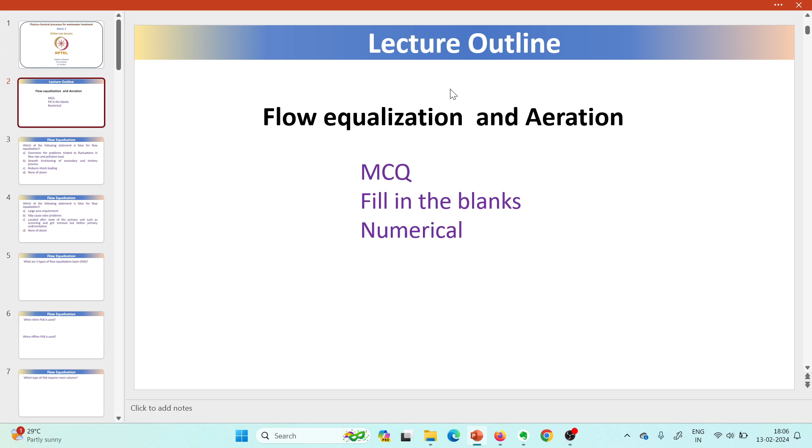So let's start now. This is week 3, and this is the lecture outline for week 3. We will study about flow equalization and aeration. Some part of aeration we will study in week 4 also, and some part we will study today.

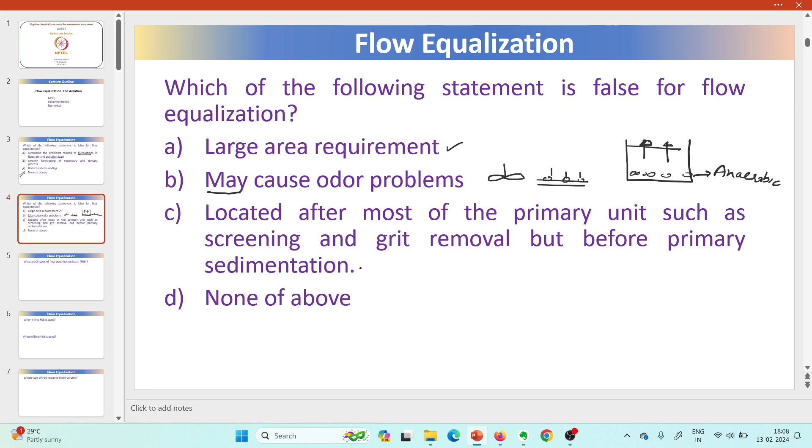Which of the following statement is false for flow equalization? It requires large area requirement - yes, it requires area. May cause odor problem - yes, it is said 'may cause' because sometimes when we don't do mixing or aeration, the suspended solids will settle and anaerobic condition will prevail. So gases will evolve and it will cause odor problem. It is located after most of the primary units such as screening and grit removal, but before primary sedimentation - yes, this is also correct. So the answer is none of these.

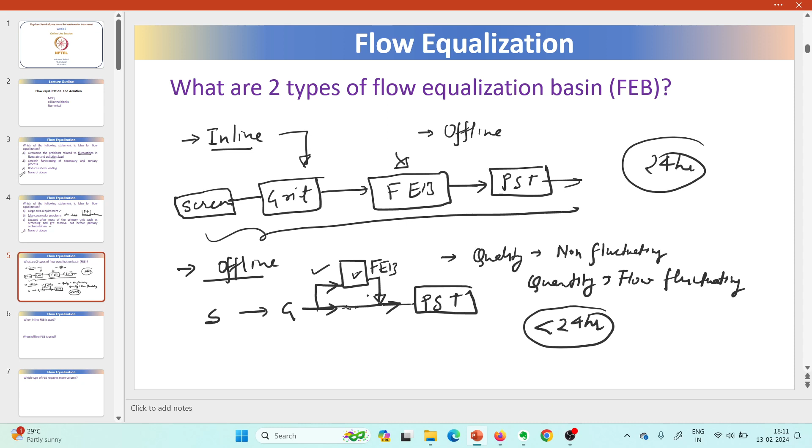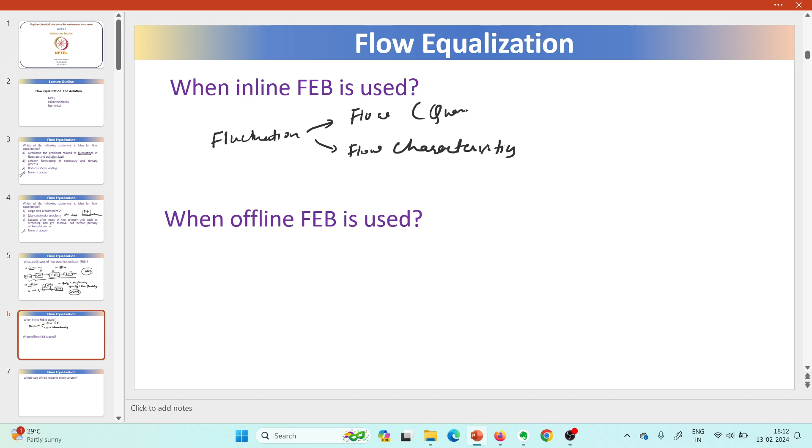So these are the two types of flow equalization basin - they are used to reduce the fluctuations of flow and flow characteristics. Inline flow equalization basin is used when there is fluctuation in flow and flow characteristics, or we can say quantity and quality. Offline flow equalization basin is used when there is fluctuation in flow only - that we discussed earlier also - fluctuation in only flow, or discharge, or quantity of water or wastewater.

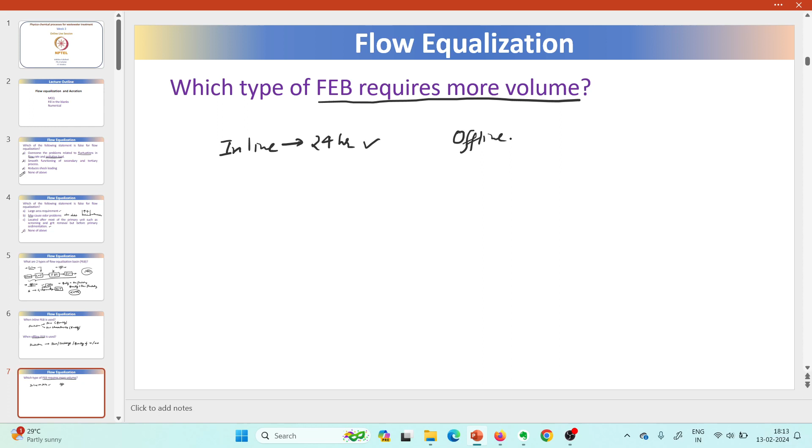Which type of flow equalization basin requires more volume? So we studied the inline will be used 24 hours - let's take an example in a day, because for 24 hours the water will enter into the wastewater treatment plant - while offline it will be used for less than 24 hours, so this will require less volume.

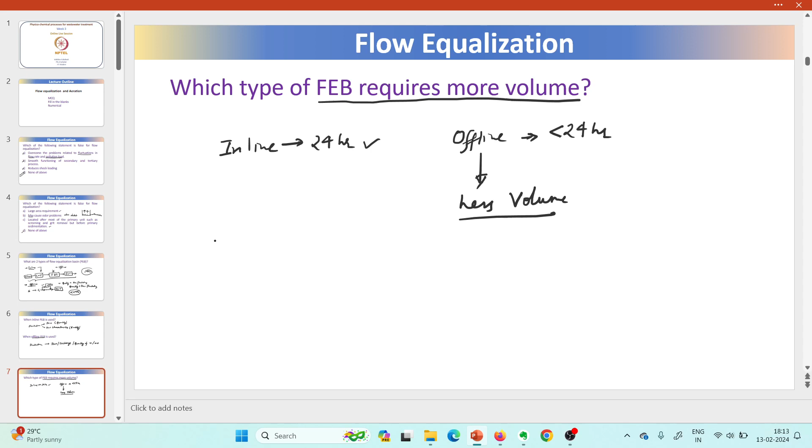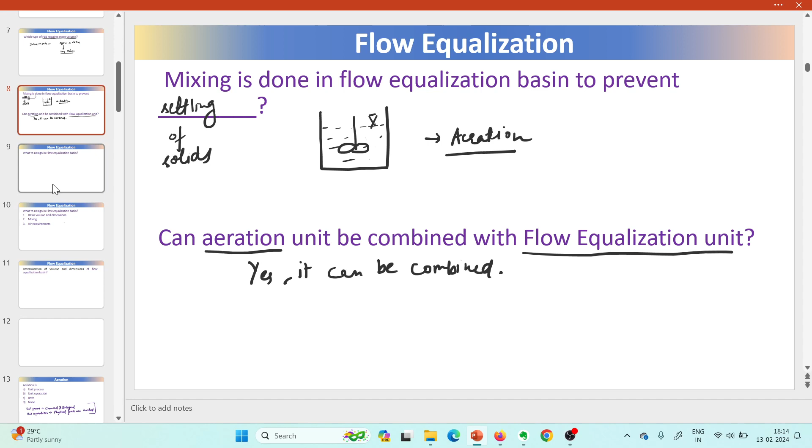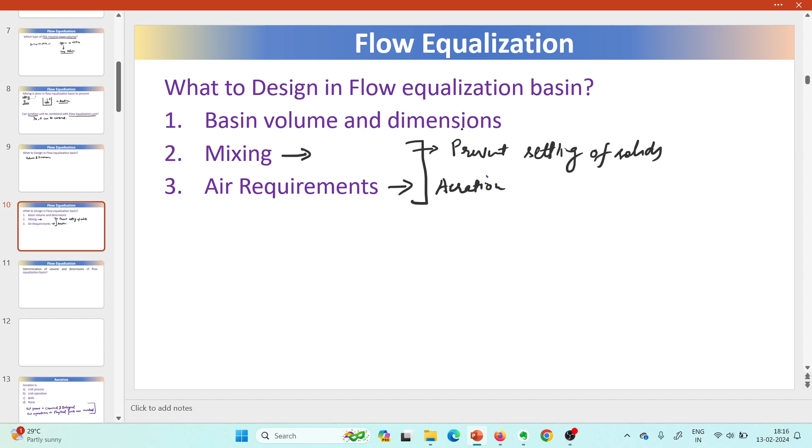So we will understand how basin volume is decided - determination of volume and dimensions of the flow equalization basin. We will study specifically how much volume is required. This we are studying for inline flow equalization basin.

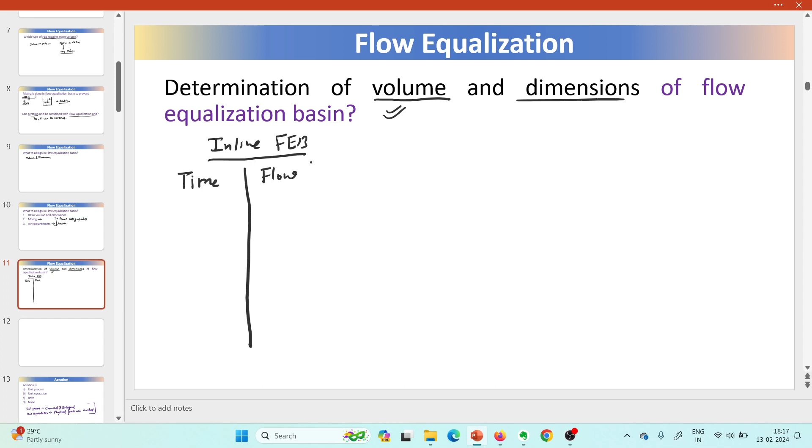So how we'll do it? We will take data of time with respect to flow - cumulative flow. Flow means supply. Cumulative, one is supply, one is demand. Here demand means average flow considered.

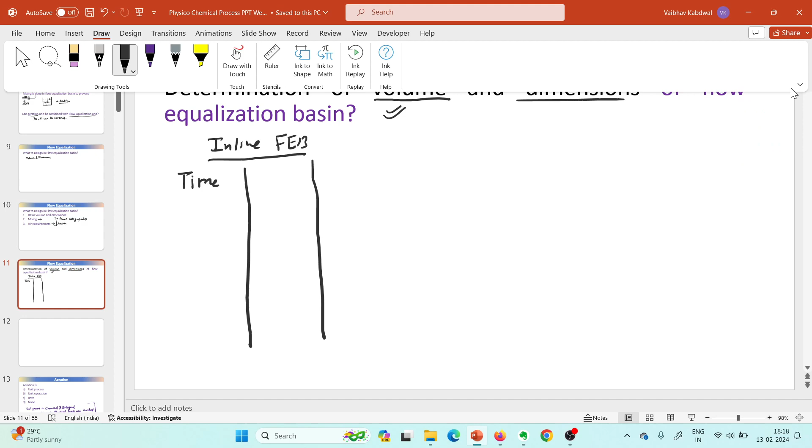So in this, what will you do? One is supply. So what is happening here? This is flow equalization basin. So this is inflow into the flow equalization basin, and this is outflow. So outflow should be how much? Average daily, we are considering it as average flow - this is supply. Let's take it as demand. That is actually not a demand, but in reservoir it is considered like that.

So we will consider it as supply. The demand we are writing as average flow, daily average flow. So this data we know - we have designed the other units with respect to our average flow.

So time we will check. We have the hourly data - 0 to 1 hour, 1 to 2 hour, 2 to 3 hour like that. We have the supply. Supply is not in our hand, but it has some fluctuations, so we will have some data of supply. This will be in our hand because we know for what discharge we have designed this flow equalization basin. So this will be x, x, x like that.

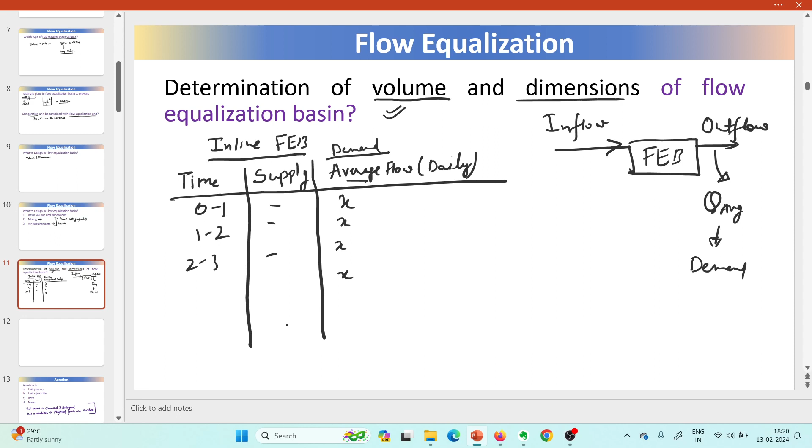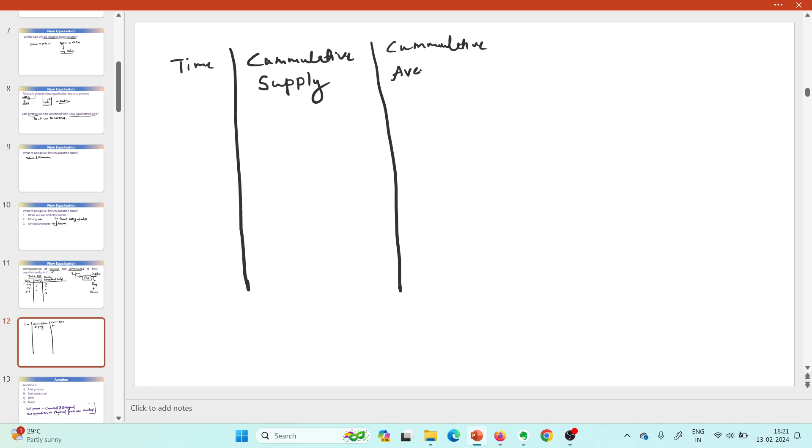So what we will do - we will find with time, cumulative supply, and we will find cumulative average flow. So what we will do, we will keep on adding. Suppose it was A, it was B, it was C, it was D - for 0 to 1, 1 to 2, 2 to 3, 3 to 4, 4 to 5. Likewise we will have so many values - A plus B, A plus B plus C.

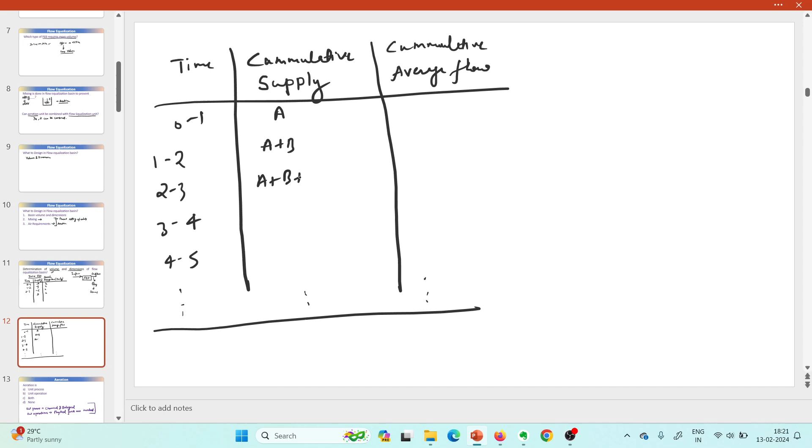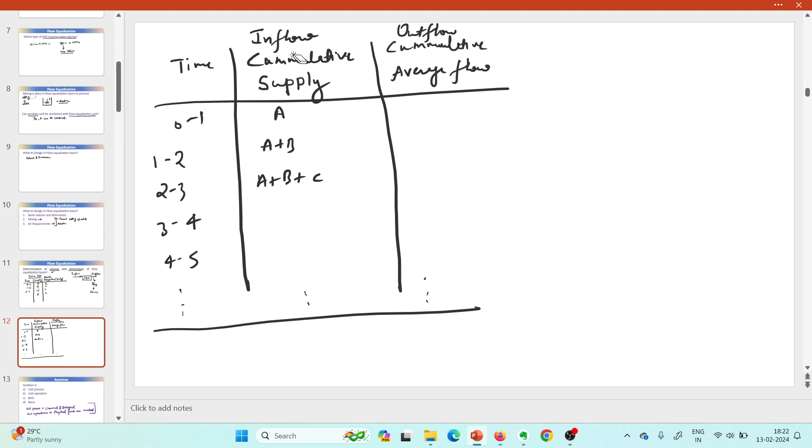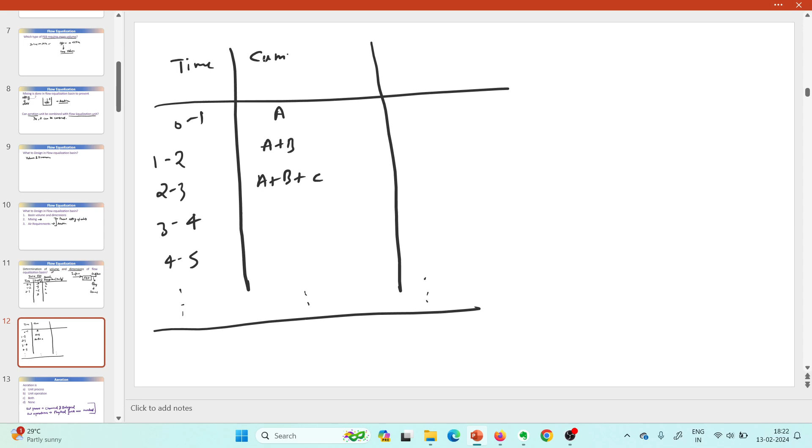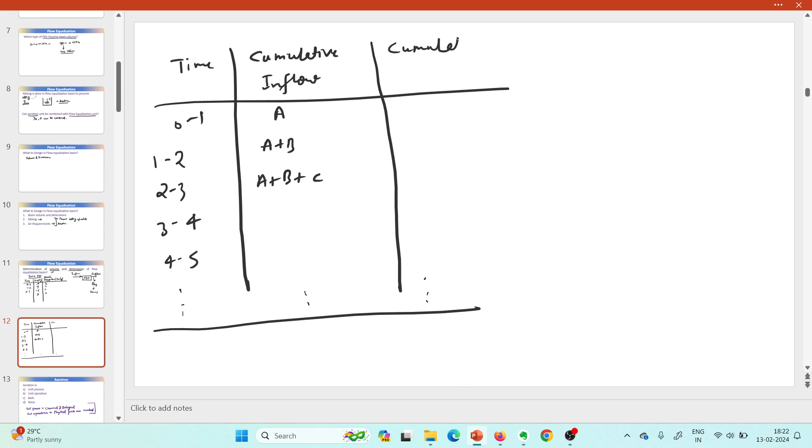Why these three variables? Because that supply, that inflow, will be varying. This is inflow, this is outflow - or we can write them as cumulative inflow, cumulative outflow. So it will be x, 2x, 3x, likewise it will be nx. And it will be A plus B plus C plus D and so on, up to nx.

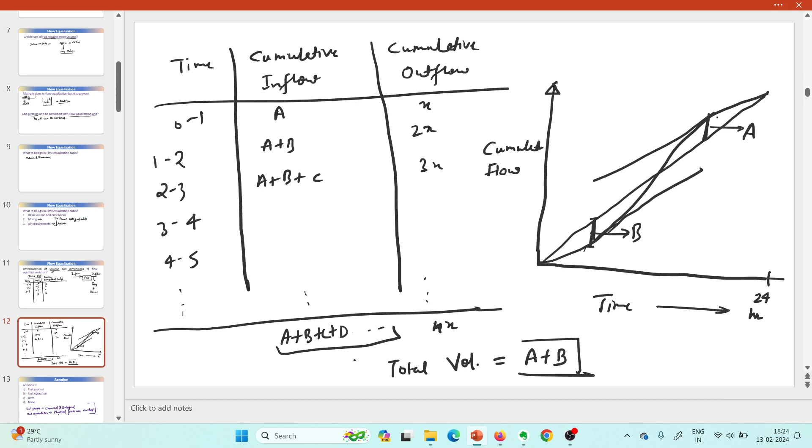Now, next question is from aeration. So aeration is a unit process, unit operation, both or none? So before understanding what is aeration, we need to understand what is unit process and what is unit operation. Unit processes are chemical and biological processes, while unit operations are physical - physical forces are involved. So aeration is a unit operation.

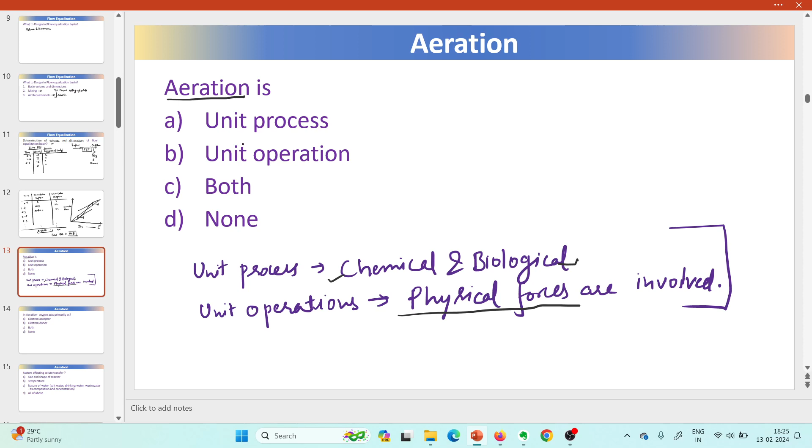In aeration, oxygen acts primarily as what - electron acceptor, electron donor, both or none? We'll understand it with an example. Let's see - this is iron. What happens in our groundwater? In villages we extract groundwater. So what happens in groundwater - there is a lot of iron and manganese.

So when we extract groundwater, the water will also have iron and manganese. When it contacts with oxygen, it gets oxidized into FeOH3 and it will be precipitated - it will be a precipitate. So what happens when it comes in contact with oxygen? Oxygen acts as electron acceptor, while iron acts as electron donor.

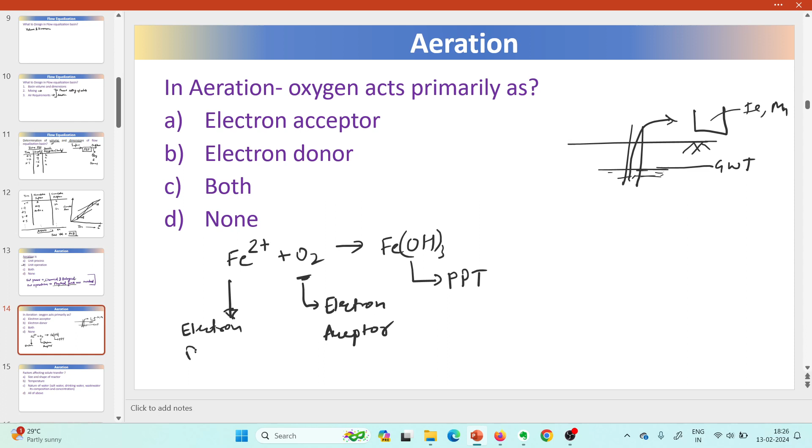So oxygen acts as electron acceptor. So A is correct. Likewise for iron, manganese, VOCs, and many elements and compounds, the oxygen acts as electron acceptor.

Next question is factors affecting maximum solute transfer. So solute transfer, we are talking about aeration. Suppose this is the water body, and oxygen is there in the atmosphere, so the oxygen will transfer into this water body. What are the factors which affect the solute transfer? Size and shape of reactor, temperature, nature of water - salt water, drinking water, wastewater - and its composition and concentration. So size and shape will also affect it.

Suppose if the reactor has less surface area, it will have less solute transfer. If temperature is more, it will affect the solute transfer because it affects the maximum saturation concentration of, let's say, oxygen. If temperature is more, then DO saturation will reduce with temperature. And if the water contains salt or is wastewater, then the solubility of elements or compounds will reduce in that water or wastewater. So solute transfer is affected by all three. Hence the answer is all of the above.

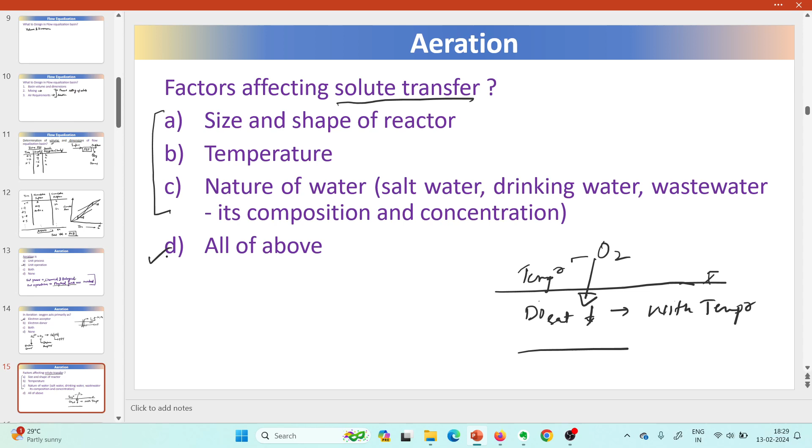Rate of diffusion of solute across a uniform cross-section area depends on molecular size, molecular shape, concentration gradient, or all of the above? So diffusion of solute across a uniform cross-section area depends upon...

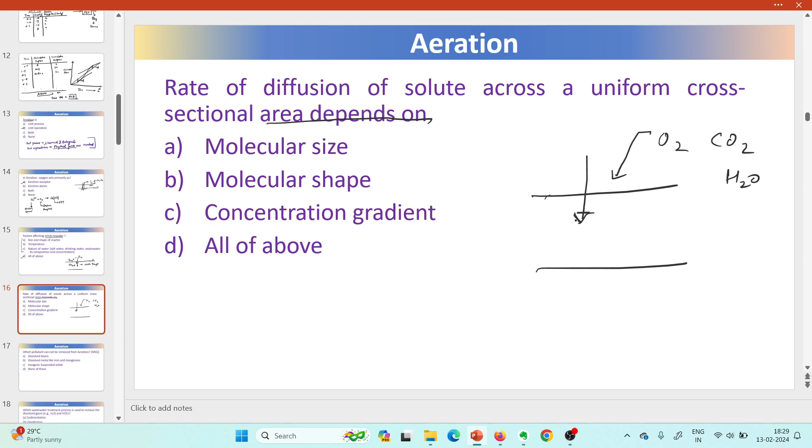So all three things affect the diffusion of solute across a uniform cross-sectional area.

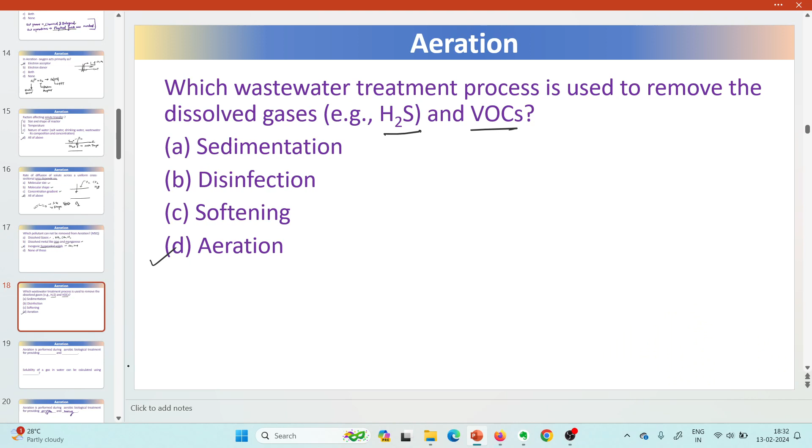Aeration is performed during aerobic biological treatment for providing oxygen and mixing. Mixing is provided to homogenize the solution - like if the microbe is here and the food (organic matter) is somewhere else, mixing brings them into contact with each other. So that's why we provide mixing and oxygen.

Hi Suresh, can you hear me? Were you there in the last class also? Last class I didn't attend, sir. Okay, no problem. Did you watch the week 2 lecture? I attended for two lectures, sir - two assignments. I am currently working in this field, sir, as a senior executive in water treatment. Sir, I want to ask you one question - while handling ETP, apart from this lecture, sir, I am asking. Okay, I can try. My video is not coming, sir. I handled ETP and while handling, I got a problem with the sludge treatment. During that sludge treatment, due to the presence of nitrogen - I'm not sure, but nitrogen contained in the sludge - it got floated on the top side and in the sludge collection tank after 1 or 2 days. Nitrogen in which form?

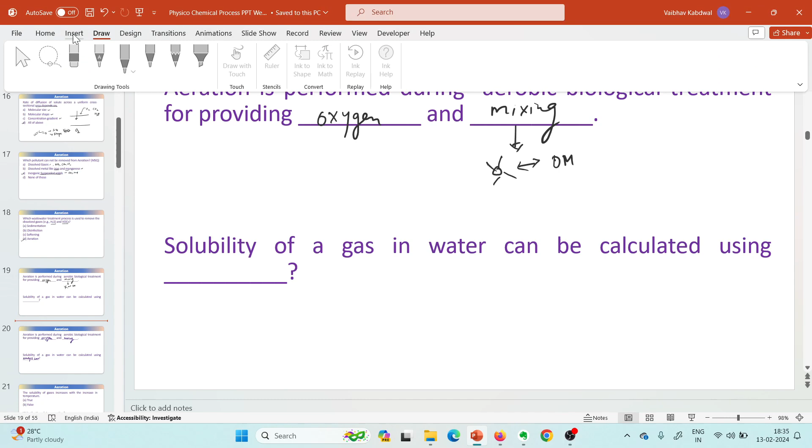I'm not sure, but from research I found something due to nitrogen content which was trapped in the sludge. It takes the sludge above and makes it float on the water. So, can you tell me again what the thing is?

So from which tank did you collect the sludge? SST, PST, tube settler sir, primary tube settler. Okay, primary tube settler. So you are telling that from the sludge, what happened?

From whatever sludge I collected, sir, after 2 days the sludge floated on the top layer. It was a 10 kl tank. It floated on the top layer, bottom separated, water totally separated, sir.

What I did is, before 2 days, I mixed polyelectrolyte into the sludge. The formation of flocs also formed, sir, and water also separated.

After 2 days, what happened? That sludge floated on the top layer, and water separated at the bottom. But sludge should be heavy, it should be separated at the bottom only. After 2 days, it floated to the top.

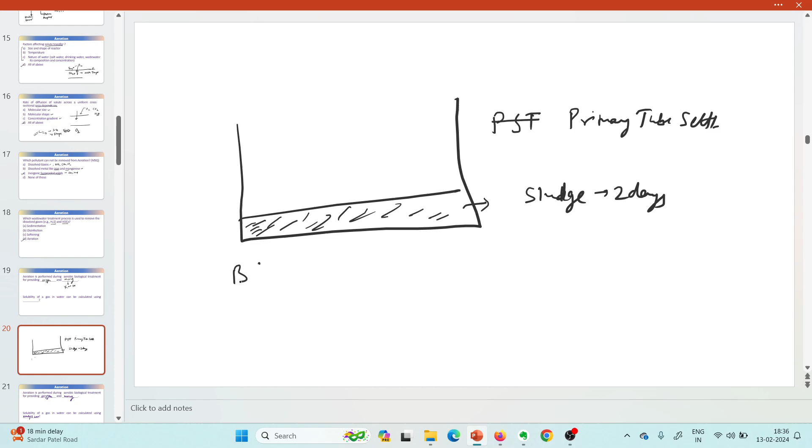Okay, was it a physical-chemical treatment or biological? Which wastewater did you use, was it biological treatment? MBBR, sir, biological. Then the thing is, this course is for physico-chemical processes.

Yes sir, I told you before, it's apart from my practice, I want to ask you some doubt. As per my knowledge, the sludge mostly should be at the bottom only, if it has specific gravity more than one.

I researched some from web sources, sir. I got to know that due to trapping of nitrogen inside the sludge content, it floated. Actually, due to trap of nitrogen, it floated. Yeah, actually, what happens now?

I used to remove that sludge instead of removing it from filter press. I used to just remove that sludge, whatever was floated. It used to remain 2 to 3 days, and I used to remove it from top itself. Like that, I was doing dewatering for so many days.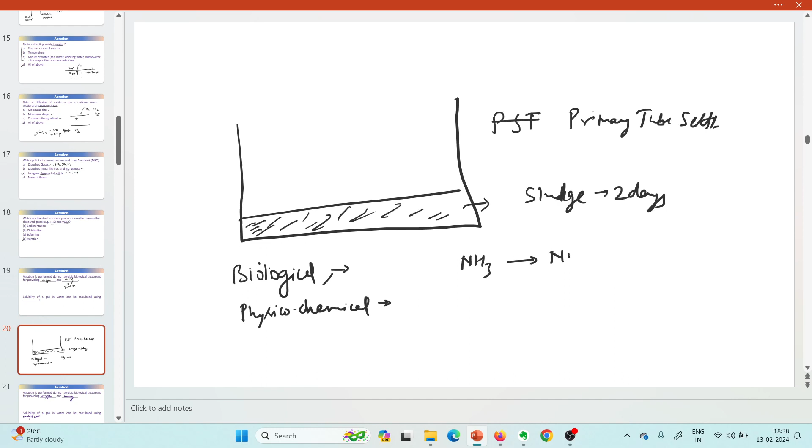Okay, it was successful, but was it the right way or wrong way? I want to know. Exactly I can't tell because I don't have much field experience. But what I can say is, what happens now, this ammonia will oxidize to first nitrate. Yes sir, this is called nitrification.

Okay, and then what happens when nitrate is converted to nitrogen gas? This is called denitrification. Yes, sir.

So if you give it more time, then this ammonia will be converted to nitrogen gas. And this nitrogen gas, if it forms, it will take the solids with it, and solids may float on the surface also, because the nitrogen gas will produce and take the solids to the surface. So maybe it can be the issue. I don't know, but this can be the process.

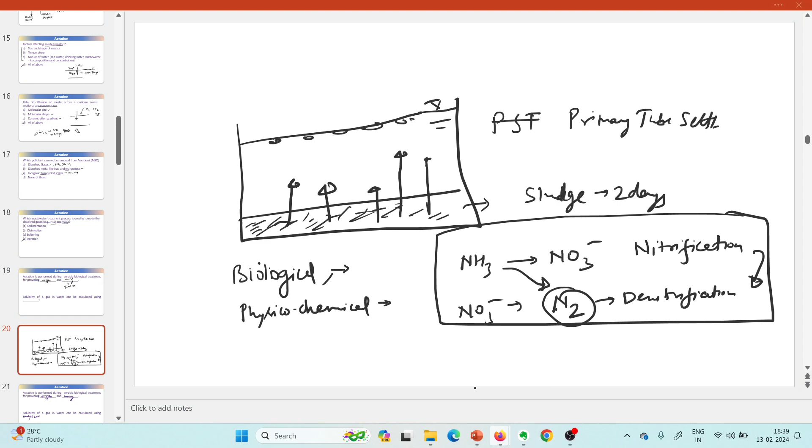Now my point is, sir, whatever nitrogen is trapped into the sludge, if I am continually removing it from the top side, after removing that sludge, will the nitrogen again release into the environment?

Nitrogen, see, if you keep the sludge for a long period, the ammonia will be converted into nitrogen gas. So better if you can remove it early, or you can consult with the engineers in that plant.

Okay, so are you taking this course? Because I am teaching some questions. I am taking it, sir, already I attended two assignments, I am going to attend the third assignment. Okay, so I'm teaching some questions so you can learn simultaneously.

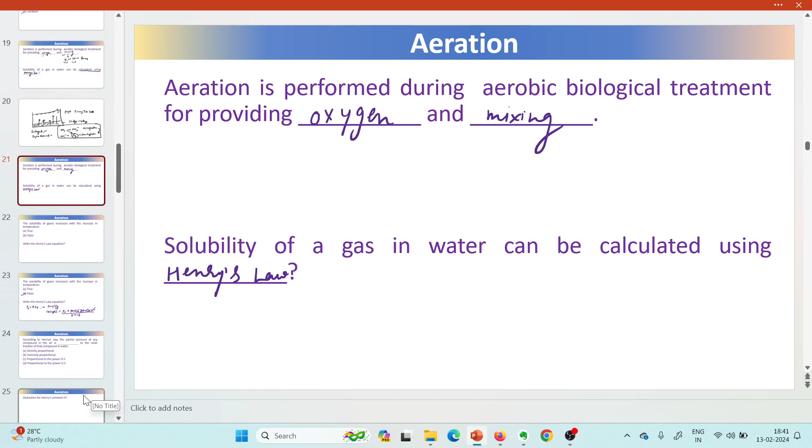Have you watched the videos of Professor V.C. Srivastav on YouTube? I have covered up to the parameters only, sir. Okay, you can watch the rest later also.

The solubility of gases increases with increase in temperature - is this correct or false? It's true, true, sir. So it will decrease. If you increase the temperature, suppose this is water, oxygen is there.

If you increase the temperature, will the oxygen reduce or increase in the water? Suppose it's a glass with oxygen inside it, so the oxygen level will decrease, I think. If we increase the temperature, water will evaporate. If we burn it, keep a burner below and heat it, the oxygen will come out.

So oxygen concentration will reduce. That's why the statement 'solubility of gases increases with increase in temperature' is false. With temperature, it will decrease.

Now, what is Henry's law? Are you aware of Henry's law? No, sir, I don't know. Okay, I will tell you. So what happens in Henry's law?

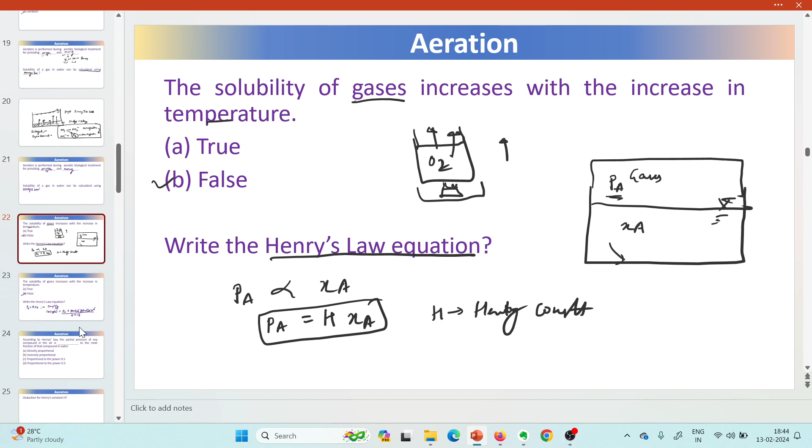So if we remove this proportionality sign, we get H into XA, where H is Henry's constant here. Mole fraction is directly proportional to the partial pressure of gas. And if we simplify this, we get this equation.

Just some unit conversions are there - you can see that in the video lectures also. If we expand the mole fraction, we get: the concentration of gas in milligrams per liter equals partial pressure of A into molecular weight of A into 10 to the power 6, divided by H into 18. That's it.

Henry's law - where is it applicable in water treatment, sir? Yeah, in water treatment it is applicable if you need to find the solubility. This concentration will tell us... look, we'll solve one question also, then we'll understand in a better way.

Okay, question will come. It will tell how much is the solubility in water. And when we aerate something, suppose in water we have some gas H2S, and if you want to remove the H2S, how much maximum concentration can we remove. So based on the temperature and partial pressure of that gas, we can calculate: if we aerate something, we can get concentration up to this limit.

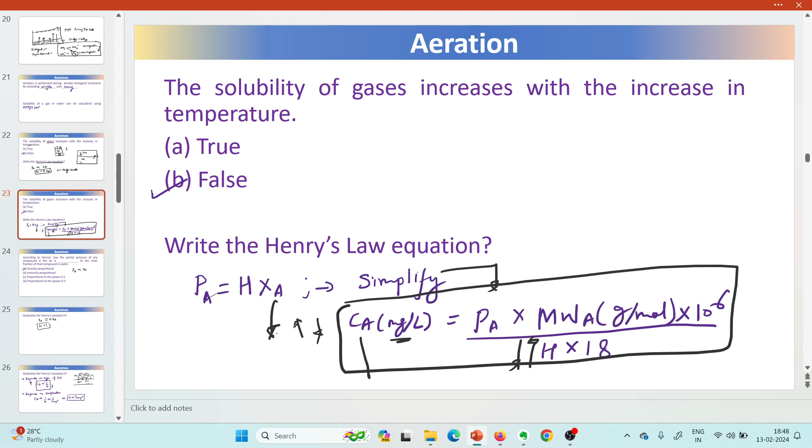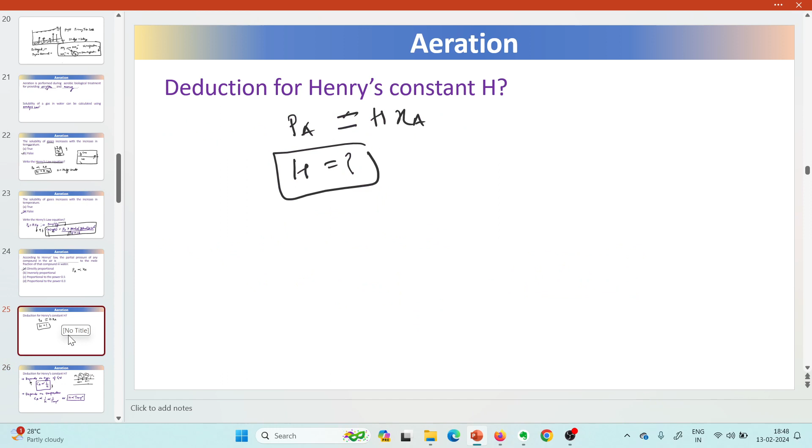Understood? Sir, so in practical how do we find the H value? H value that we have to calculate through experiments only.

This H value also depends on the temperature. If temperature is more, then our solubility will be less. And H value is directly proportional to temperature. So if more temperature, more H value, and if less temperature, less H value. So these are some conclusions from Henry's constant.

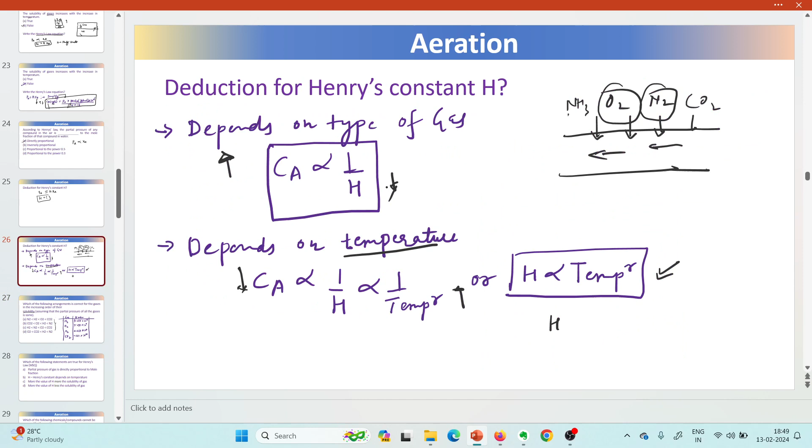So we know that if H value is less, solubility will be more. The constant is inversely proportional. So which one will be the answer? If partial pressure is same, H value...

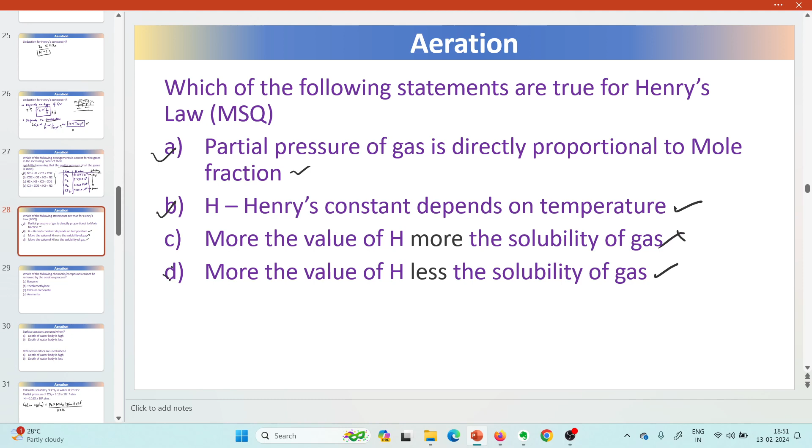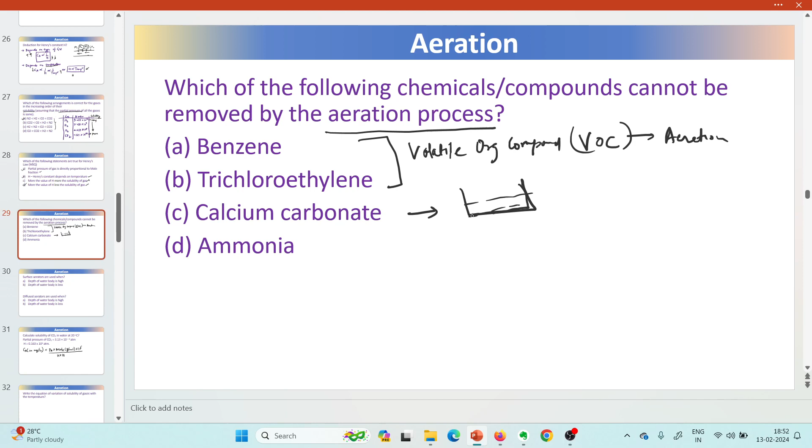This is calcium carbonate, it is a precipitate. We have heard like calcium carbonate will precipitate in our utensils at home. You can see some white precipitate. Those who use hard water and boil it in utensils can see white precipitate - scaling - on the walls of some utensils.

So we have to remove calcium carbonate through physico-chemical process, not just physical. Yeah, calcium carbonate. We will study later how to remove it. Calcium carbonate means lime only, sir - lime is actually CaO or Ca(OH)2.

Calcium hydroxide, this is lime. These two are the forms of lime. Calcium carbonate is something else - calcium carbonate is hardness only, CaCO3. You have to remove it through ion exchange. Hardness can be removed through ion exchange, precipitation, and boiling also. We will study this further in week 4, 5 or later.

So ammonia is a gas. What we will do is supply oxygen, and the ammonia will come out - simple process, that is called ammonia stripping also. So we'll increase pH also, we'll see that later.

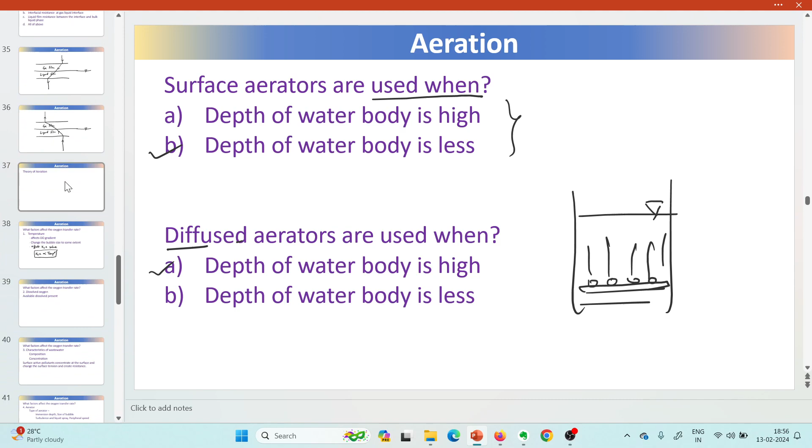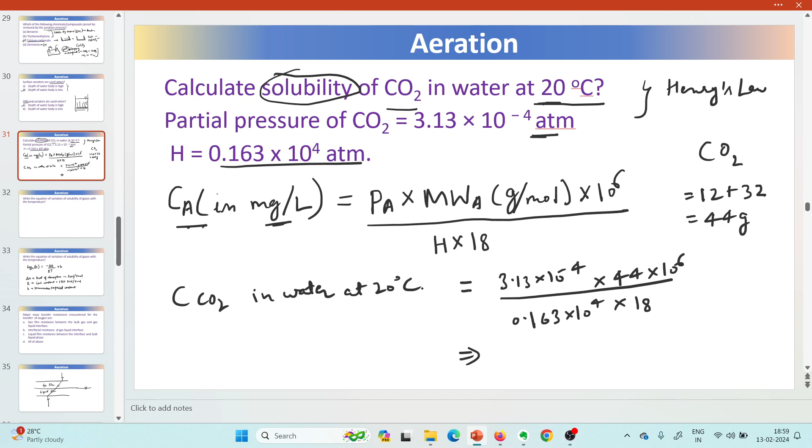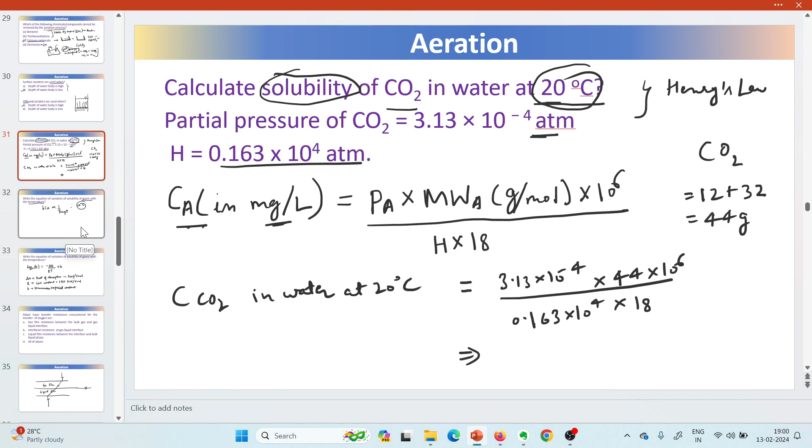Write the equation of variation of solubility of gases with temperature. Is it inversely proportional to temperature? No - I'm asking about Ca with temperature. We know that temperature is inversely proportional to Ca. But if I need to calculate the same thing at 10 degrees Celsius - the previous question was at 20 degrees Celsius - how can we find it out? This we can calculate through an equation.

That H value in Henry's law - PA equals H into XA - this H will vary with temperature, and we calculate H through this formula: log base 10 of H equals minus delta H by RT plus B. This is an empirical equation, where delta H is heat of absorption in kilocalorie per kilomole, R is the gas constant given, and B is a dimensionless empirical constant. So if we need a different temperature, say we need to calculate at 10 degrees Celsius, we'll first convert it into Kelvin.

So temperature 273 plus 10, we'll convert it into 283, then we will put it here. R we know this value, delta H will be given to us, and B will also be given to us, so we can calculate H. This H we will put in this equation, and we can calculate the solubility. Simple only.

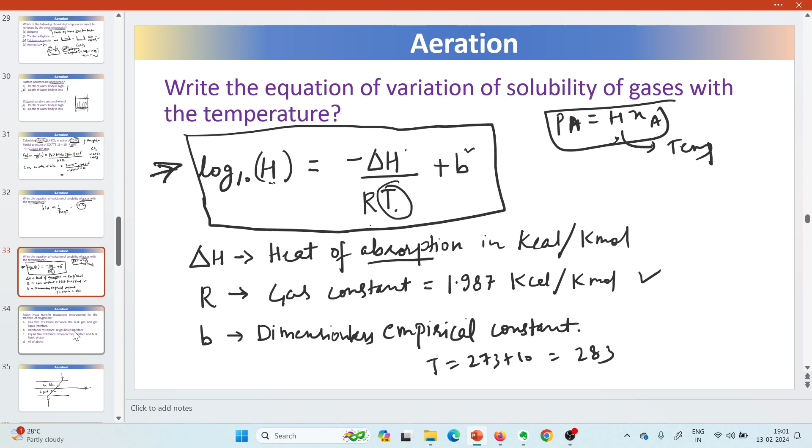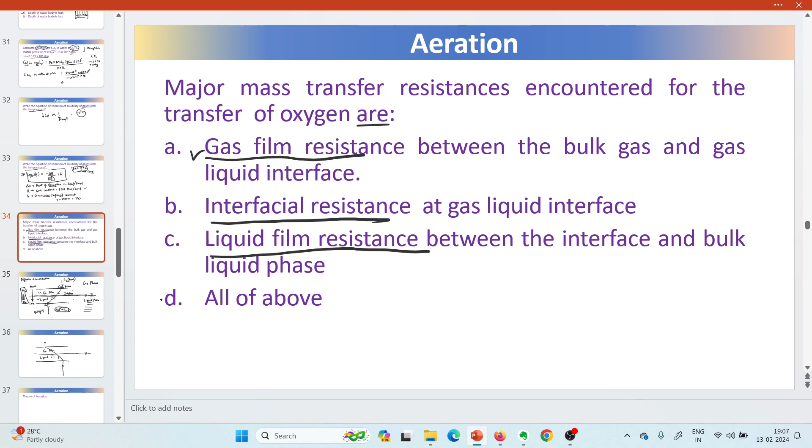So the answer will be gas film resistance, interfacial resistance, and liquid film resistance - the resistance between the interface and bulk liquid phase. All three are correct, so all the above is the answer. So likewise, this thing will also happen.

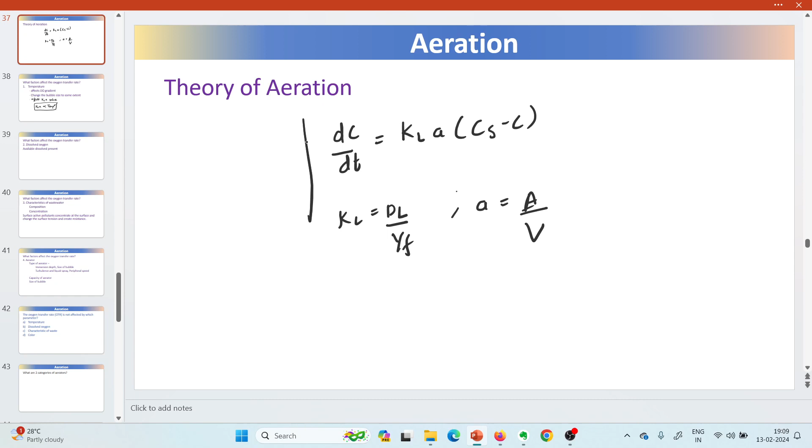Theory of aeration - I told you what happens. Change in concentration is equal to KLA into Cs minus C. So this KL will be equal to DL by YF, and A is equals to A by V.

What happens is this is derived from Fick's law of diffusion. What does Fick's law of diffusion say? Same thing like mass transfer - rate of change of mass is equal to DL, this is actually our diffusivity constant, into area, interface area, into dou C by dou YF.

If we plot concentration versus distance, what are we assuming? There is only one film, the liquid film. Here it is gas, here it is liquid. This is liquid film. The concentration will vary like this - this will be Cs and C.

So first we use this equation, and if you solve it, we will get this equation, dC by dt. We will solve the question based on this formula in the next class. Just for the sake, I have told you these equations.

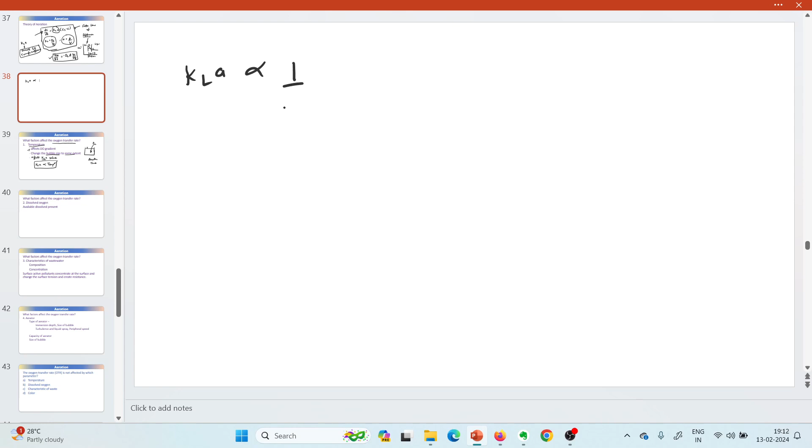This KLA is inversely proportional to resistance and directly proportional to temperature. So if resistance is more, then KLA value will be less, and if temperature is more, then KLA value will be more. Its unit is time inverse. So KLA value is directly proportional to temperature.

Sir, how to find KLA value? We have here two equations that I told - KL is DL by YF, and A by V. DL is the diffusivity constant, sir. How to find the diffusivity value, KLA value? We'll do it through experiments - I will tell a little bit about that.

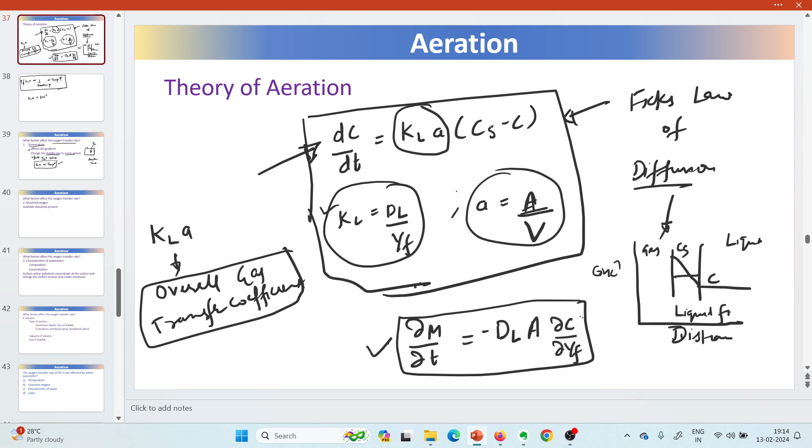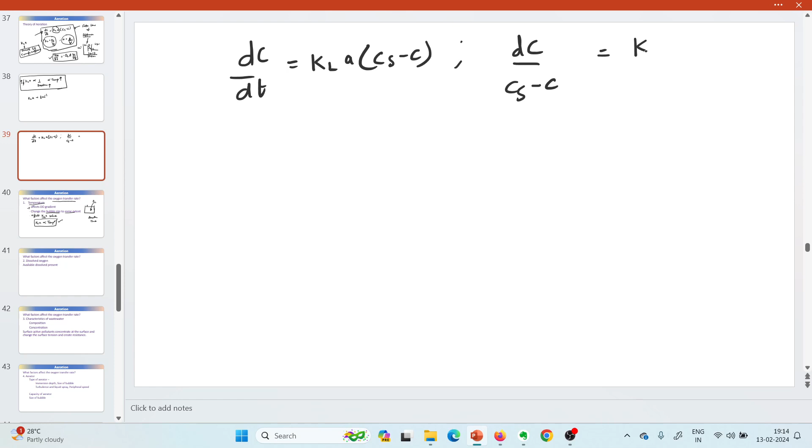This equation you know - dc by dt equals KLA times CS minus C. Through the graph we will find out the KLA value. Insert dc by dt equals KLA, CS minus C. If we integrate this, dc by (CS minus C) equals KLA dt. Integrating, it will be ln(CS minus C) equals KLA T, with limits from C1 to C2, T0 to T - let's take it as 0 to T. So ln(CS minus C2) minus ln(CS minus C1) equals KLA T, which gives ln[(CS minus C2)/(CS minus C1)] equals KLA T. So this is the equation.

So this is the saturation concentration we have. Initial concentration we will take as 0. Now we do the experiment - first we remove all the DO from the water, so C1 will be 0, CS will be, let's say, 9. Then with time t equals 0, t equals 5, t equals 10, we turn on the aerator and check the DO value with time - that will be C2. We are getting data, so we'll plot the graph, which will be y equals mx.

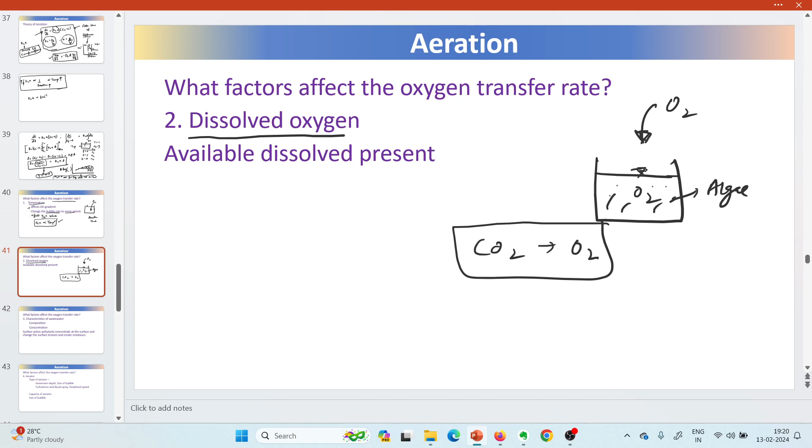So like oxygen transfer, suppose already the oxygen is saturated here. Let's say algae is there, and algae is producing oxygen. So will the oxygen transfer occur from the atmosphere? Suppose the water has algae already present, and algae produces oxygen. They consume CO2 and produce oxygen. So oxygen is already present in the water, so from the atmosphere the oxygen will not come, due to the concentration gradient, because oxygen is already present, or it may go out also if more oxygen is getting produced. So whether oxygen is present or not is also a factor which affects the oxygen transfer rate.

The third factor is characteristics of wastewater. Suppose your wastewater has a certain composition, we need to know what is the concentration of specific substances. There are some substances which will float on the surface, like surface active pollutants. They will concentrate on the surface and change the surface tension and create resistance, so then oxygen can't enter inside.

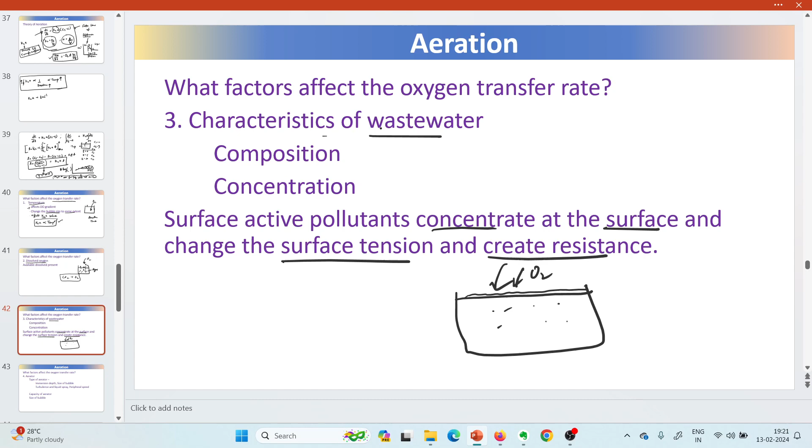Understood? Yes sir, like oil. Yeah, oil and hexane and all, there are many things which will prevent oxygen transfer. So the characteristics of wastewater also affect the oxygen transfer rate.

The fourth thing is aerator, which affects the oxygen transfer rate, because we have different types of aerators. One is where we are just agitating it, another where we provide air bubbles from the bottom through a pipeline. So the type of aerator we are using affects the oxygen transfer rate, like immersion depth and size of the bubble for diffused aerators, and how much turbulence, liquid spray, peripheral speed and all depends on the type of aerator.

Other factors are the capacity of the aerator and the size of the bubble. A smaller bubble size is preferred.

Next, what is the oxygen transfer rate not affected by? Earlier we studied what it is affected by. It will be affected by temperature. Not affected by... color, sir. Color, correct. These all three will affect the oxygen transfer rate.

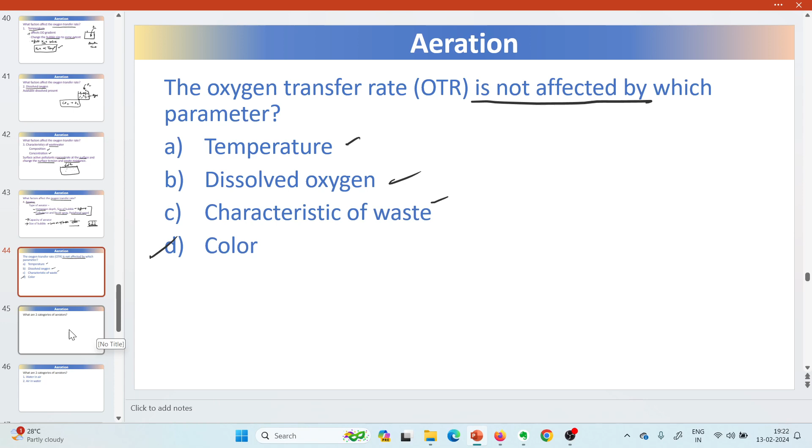What are the two categories of aerators?

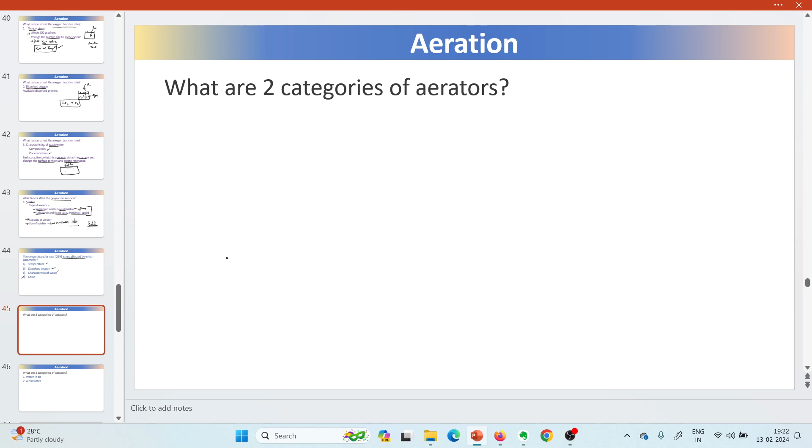Diffuser type and rotating - these are not categories, these are actually characteristics. Two categories are water in air and air in water. Okay, I will tell you, you will understand it very easily.

So, water in air - what will we do? Let's take an example. Have you seen spraying of water? Water is sprayed like this, that will also transfer oxygen. So, water is in air.

And air in water means, you know it very well - diffused bubbles. These are the two categories.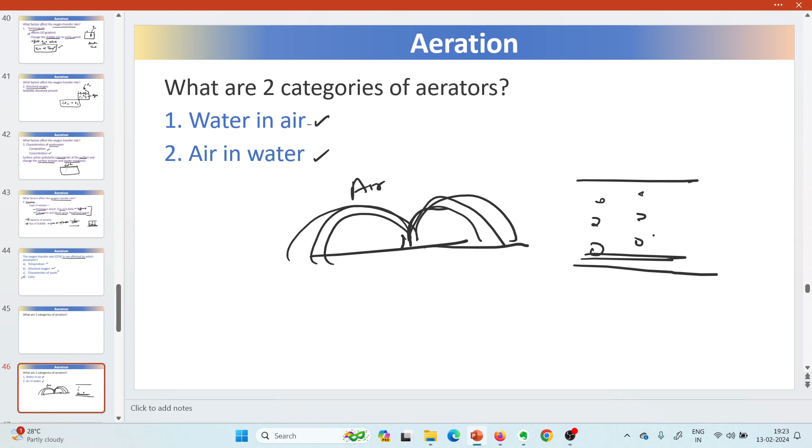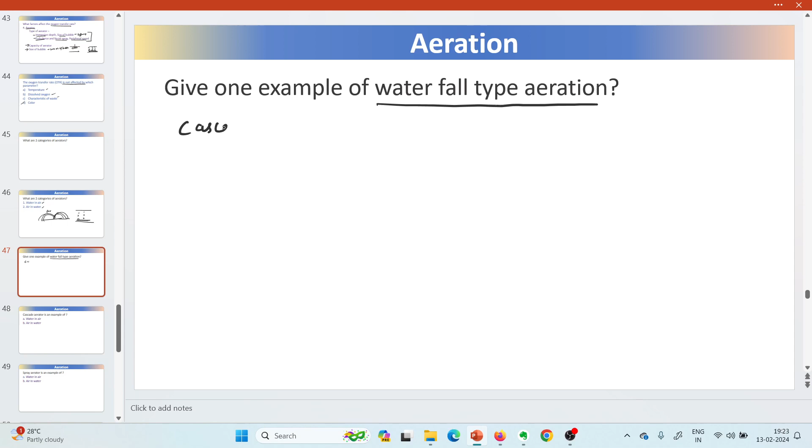Give one example of waterfall type aeration. So waterfall type - have you heard of cascade aerator? I didn't, sir. I know rotating drum aerator - half that drum will be half submerged and it will be continuously rotated.

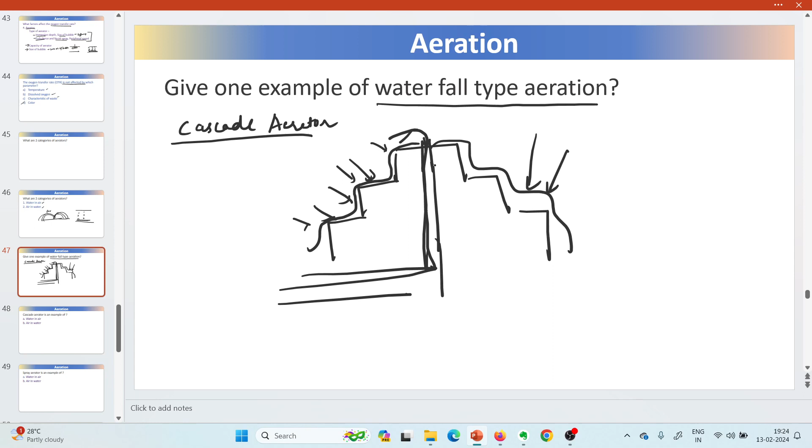Cascade aerator is like this, step by step. The water will pass from this bottom pipeline, supplied through the pipe, and go step by step from this pipe. So it will form a thin film like this, and oxygen or air will come in contact with it, causing aeration to occur.

Cascade aerator is a type of - think and tell. Now you told me water and air - A or B? Water in air, yes sir. Correct.

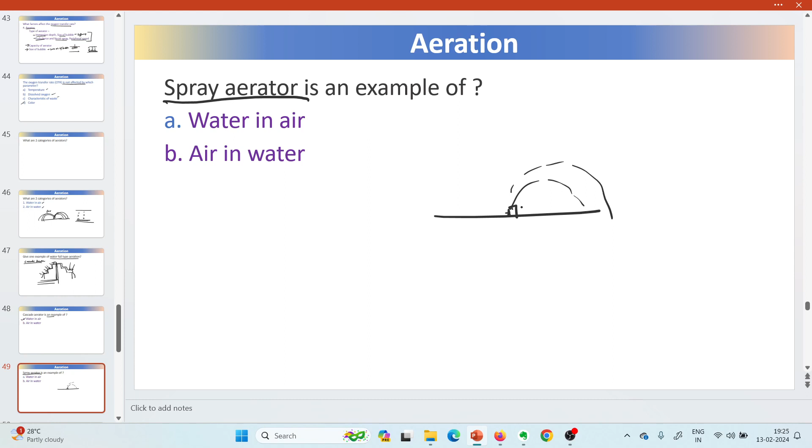Now tell, spray aerator is an example of what? Spray aerator is water in air, na? Correct.

Tell, pressure aerator is an example of what? It will inject - pressure aerator means it will inject air bubbles into the water, sir. Yeah, it will inject air bubbles into the water, so that is air in water. Correct.

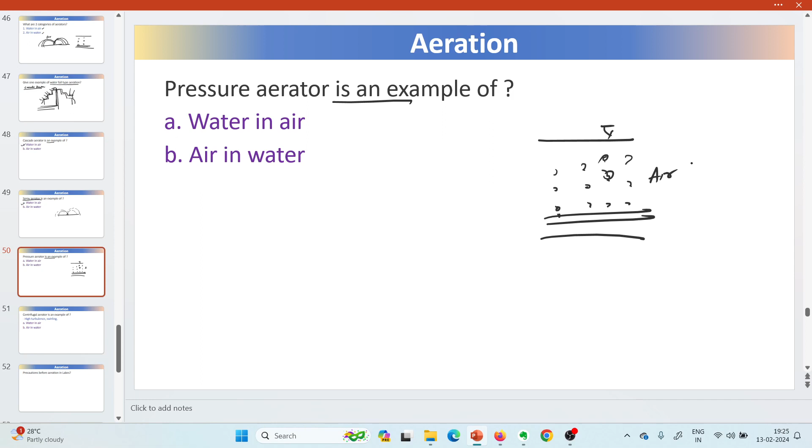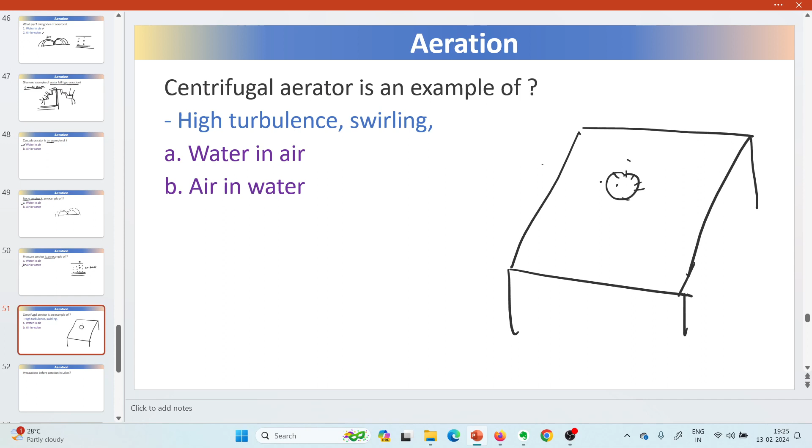Read this - centrifugal aerator is an example of what? Centrifugal aerator means the rotary part, it will be moving. Let's take the flow - this is the top area I'm just making, centrifugal aerator. This will float on the surface. So these are the blades, it will keep on rotating like this.

And if you see it from the side, it will have blades like this, so it will rotate, and the oxygen will come from the top. That will be water and air - water in air, air in water - so it will cause high turbulence and swirling.

Water in air - both it will be. Let me check, I have a doubt in that. Most probably, I think it's water and air only, most probably.

So characteristic of a centrifugal aerator - it won't diffuse air into the water, sir. Okay, due to the centrifugal aerator turbulence, air goes into the water - it is air in water. So what is happening? The air is coming from outside and it is going inside, so it is air in water.

Because water is here only, water is not contacting, not going out - the air is coming from the outer atmosphere. Then it will be submerged fully? No, no, actually this will be provided when depth is less. I will make a diagram.

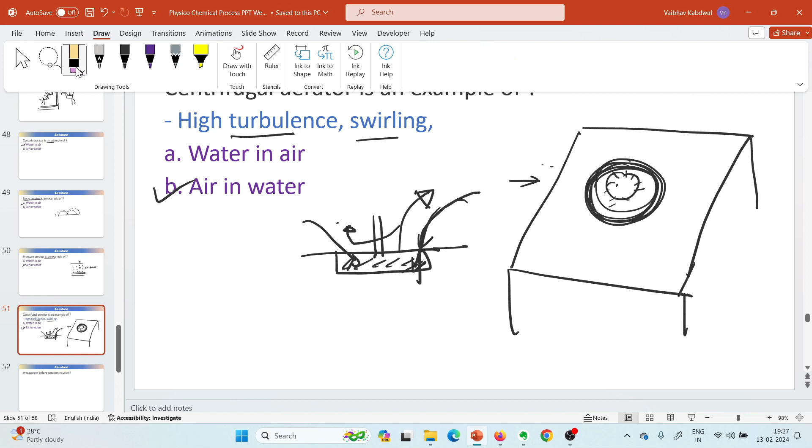I will make it - what are those blades? Blades will be submerged fully, and that air from the atmosphere will go inside, and then it is called air in water. The blades will be somewhat parallel, at 45 degrees - blade design is also there in mechanical engineering and all, maybe they can design the blades also. It is like that, so it will be like this.

By the blades, it will suck the air from outside to inside. The blades will be like this, and it will rotate, and it will cause some turbulence, and air from the atmosphere will go inside. So it will be air in water.

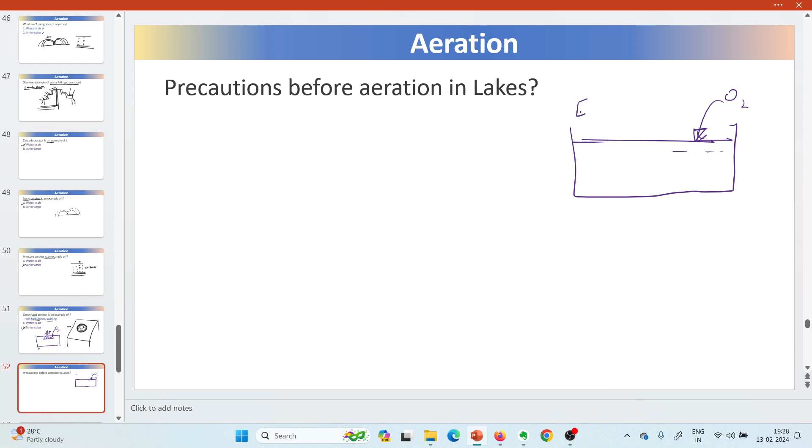Precautions before aeration in lakes - so if you are going to aerate the lake, this is the lake, what precautions will you take? We have to remove foreign matter first, because the lake has its own ecosystem. Foreign matter is another thing - suppose some floating materials are there, we will remove that.

So our main concern is to use laminar circulation. So what happens now - if you are in a lake, there will be some sediments at the bottom, and it has fishes, and it will have some other aquatic species also.

These species should not be affected, so for that we will use laminar circulation, meaning it will have Reynolds number less than the value we know. We need to ensure that these sediments should not resuspend or be disturbed. If they resuspend continuously, it will affect the life of fish and other aquatic species in the lake, so we need to take care of this. It is not like we will directly go and set up all the aerators.

One more thing we do: suppose one aerator is installed here, we calculate how much area it can cover. Based on that, we can calculate the aerator requirements. In the top view also, we can find this out.

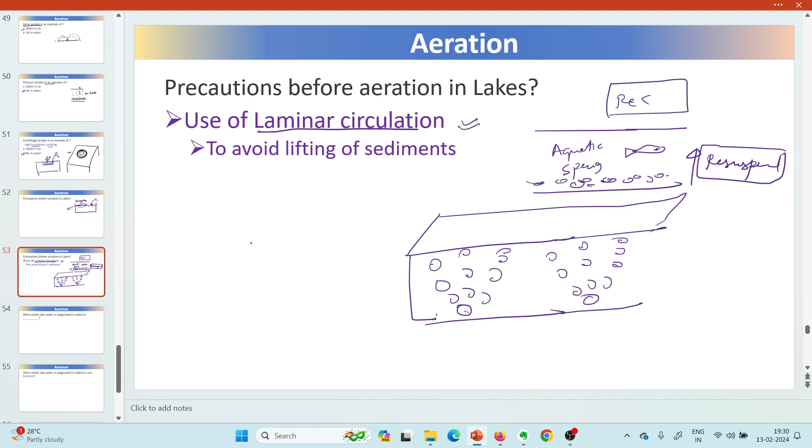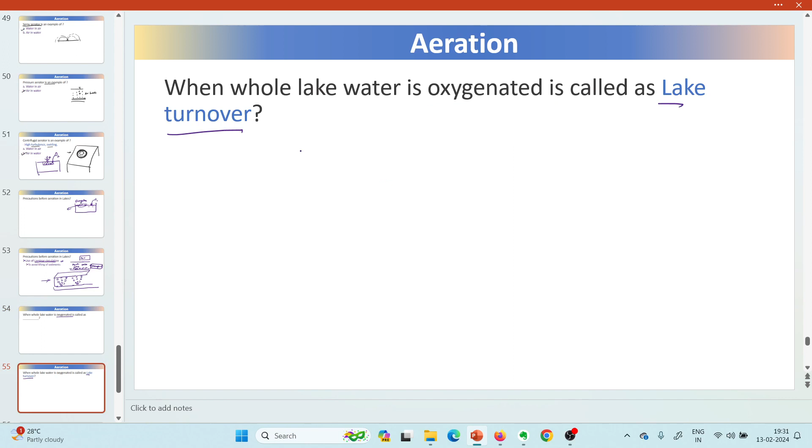When the whole lake water is oxygenated, like in this example I showed, if we cover the whole lake like this, so when the whole lake water is oxygenated, it is called lake turnover. When the whole lake is aerated, it is called lake turnover.

Power requirement for a water body to maintain a given turbulence level and mixing are dependent upon certain factors. Power requirement for water body to maintain a given turbulence level and mixing - it's easy only.

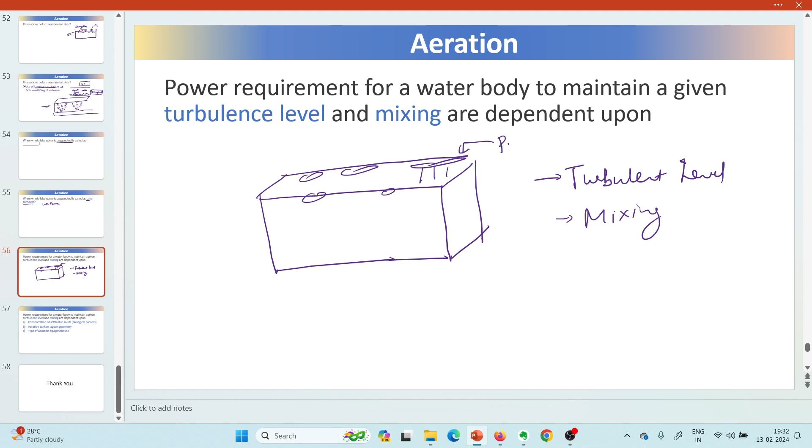I will tell you. Suppose you are installing an aerator in the actual aeration tank - in this aeration tank you need to set up the aerators for a particular turbulence level and mixing, so power will be required. For the aerator, we need to supply power. So how will you decide how much power to provide for a particular aeration tank? You need to know what is the type of wastewater.

And requirement of oxygen. So here I have written: you need to understand the concentration of settleable solids - how much settleable solids are there, how much is the concentration. So how much aeration we need to provide to ensure them to resuspend into the water. So I need to know how much is the concentration of settleable solids in the aeration tank.

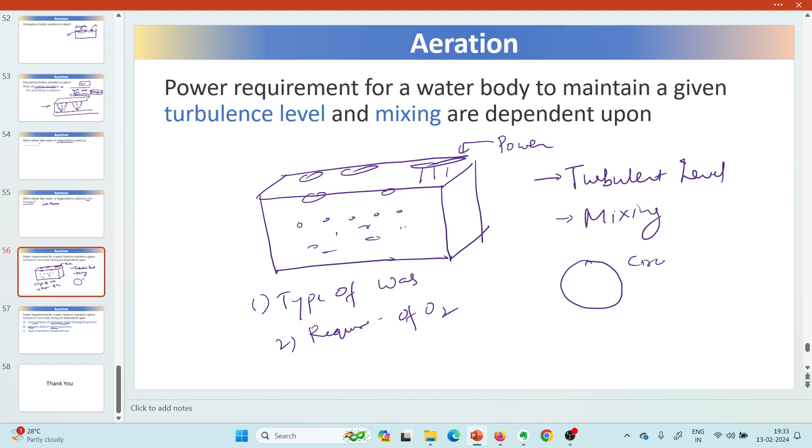Let's take an example: what is the geometry of that tank or lagoon? Suppose here it is rectangular from top, it can be different if it is circular, then it can have a different effect. And type of aeration equipment used - suppose the equipment we are using is centrifugal, and if you use diffused spray, then it will have a different effect.

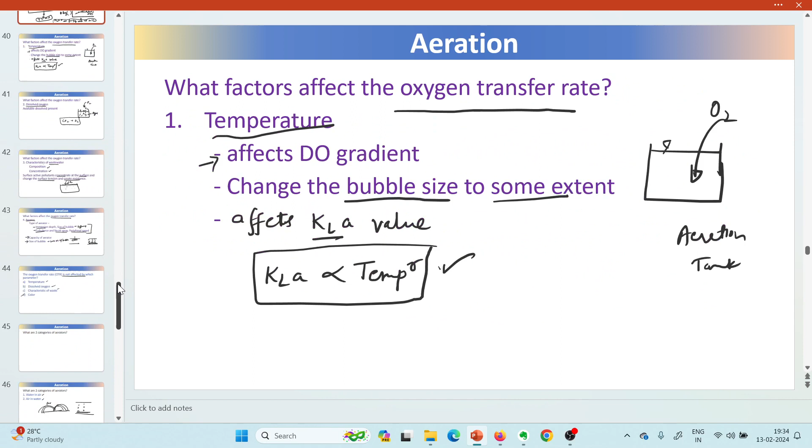So power requirement of water body depends on these three things: concentration of settleable solids, aeration tank geometry, and type of aeration equipment used. So we have covered today's PPT. If you have any further doubts, you can ask.

Do you have any doubt which you didn't understand today? No, it's fine, I think. So we will, ask.

I have only one person attending the classes, sir. Actually, this is a master's level course, so very few people attend and they may watch it on YouTube if they need. This is my first class attending, sir. First time, okay. Last time two or three people were there, and this time only you came. Sir, you are from... I am doing PhD here from IIT Madras. You are PhD in water treatment? PhD in environmental engineering. You have done BTech in civil engineering or chemical engineering? Chemical engineering, sir. Nice, nice. From past 8 years I'm in wastewater treatment, in pharma industry. Nice, nice. I have only a little bit of practical knowledge, theoretical knowledge I didn't have. With time it will come, but if you study you can gain it. That's it.